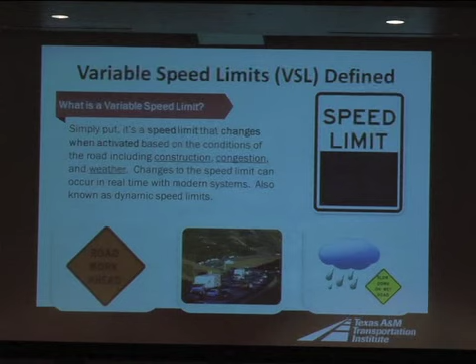And the conditions that might trigger variable speed limits would include construction, a work zone application where you have congestion that's building, a regular congested corridor where on a daily basis you have congestion that builds just because of traffic and conditions, and then weather. So there's a variety of weather applications that might generate a need for variable speed limits. And the idea is to use technology to monitor the conditions of the facility and trigger that variable speed limit as conditions warrant, so that the drivers are aware of the conditions that are occurring.

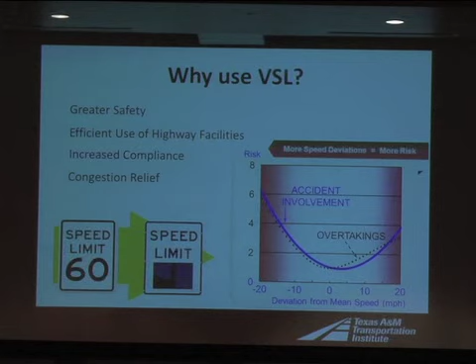So there's 3 applications that are typically used to activate VSL, and I've mentioned those before. Congestion, where you are measuring speeds, volumes, and occupancies on the corridor, and an algorithm running in the background, a lot like the queue warning when the smart people come up with the algorithm. And when the data coming in says we have congestion building, let's trigger the VSL, then that's the first application.

Lane closures, they function very similarly because you have congestion building as a function of a lane closure or a work zone application. So again, the algorithm triggers the variable speed limits. And then in weather, the 2 typical measures that will trigger the VSL would be pavement surface friction, so that's looking at water and ice on the pavement, as well as visibility. And the visibility could be a function of fog, heavy rain, or snow.

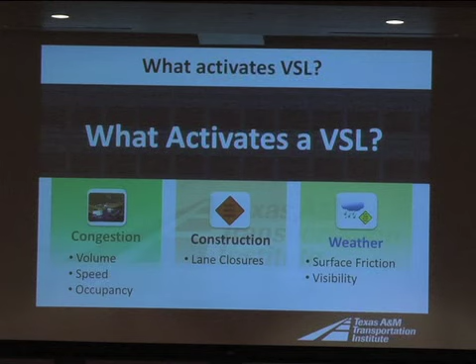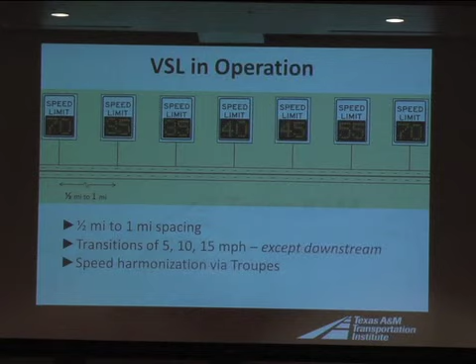In operation, this is a layout you might typically see. The spacing between the individual signs might be anywhere from a half mile to a mile. And the idea is to transition the speeds down slowly so a driver gradually reduces his speed as he comes up on the back of a queue. And the harmonization or the uniformity of that is all done by an algorithm that measures all the traffic out in the field in different segments.

So in the activation stage, the variable speed limit, the way it's operated here in Texas and in a lot of other locations, the algorithm running in the TMC determines that the VSL needs to be activated. So the system will alert the traffic management center, and an operator in the traffic management center will get an alert that says VSL needs to be activated. And in this case, an operator will either accept that plan that's being recommended by the algorithm or deny it for whatever reason it might be.

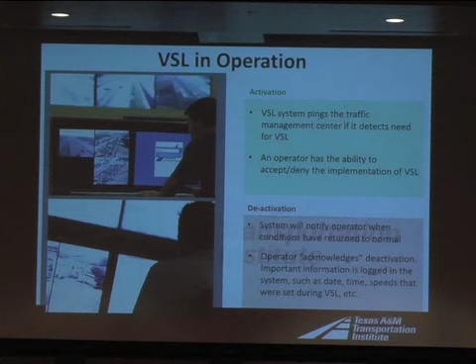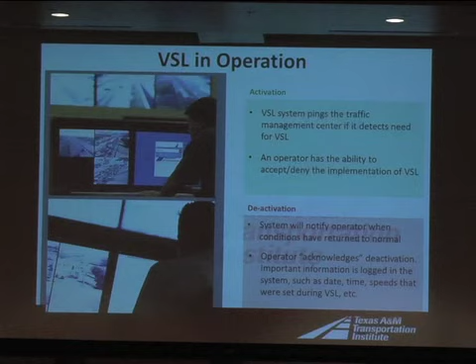And then if the algorithm is accepted, then the system goes into operation and the speed limits start to change. It can change as often as every 2 to 3 minutes based on how quickly that congestion is changing out in the field. And then in the deactivation, it's very similar. Once the need for that VSL goes away, the operator can basically deactivate the VSL and it goes back to the standard sign of what the speed limits are indicated for that location. In this case, it's 70 miles per hour.

So in 2013, the legislature passed House Bill 2204 to authorize TxDOT to conduct a pilot study to look at variable speed limits. Up until that time, VSL was not possible in the state of Texas. And in most cases, the states have to go in and have authorization to do it. So the legislature wanted TxDOT to be able to test it, see if it has the potential to improve congested conditions for a variety of applications.

The law passed required that TxDOT select at least 3 locations to look at variable speed limits under 3 conditions that are listed here: construction, congestion, and weather. The bill actually expires in February of this next year. So the study had to be done before February.

The law also required that we have advanced warning signs to alert drivers that the speeds are going to be reduced. And TxDOT worked with TTI to develop an interagency contract to help TxDOT with the deployment and an evaluation of these pilot studies. And that's TTI's role. We've also worked with Southwest Research, and I'll get to that a little bit as to why we were engaged with Southwest.

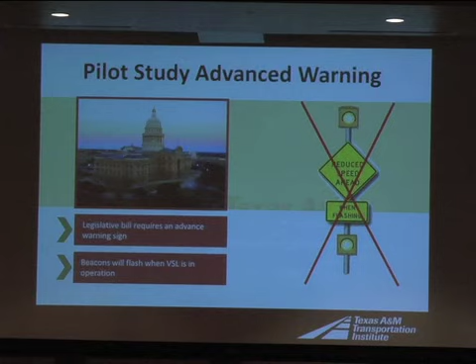So the pilot study advanced warning sign, this is typically what a driver would see if we were reducing speeds as you're coming into a different speed zone. The legislative bill required this sign, and we felt that that was very difficult to install for a short-term pilot study.

So we came up with this sign that is just a portable changeable message sign that we put out in advance of the VSL corridors, and it just indicates that there's a reduced speed ahead. And it is connected to the variable speed limit signs. And so when the VSL algorithm isn't operating, this sign just says drive safely.

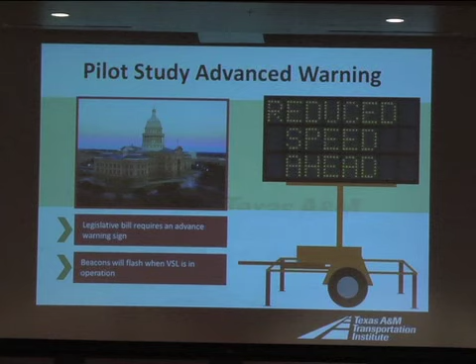So the pilot study started in January, and we have helped TxDOT along the way with the selection of the 3 sites, the development of an implementation plan, which involved the design of the signs and the system. We worked with Southwest Research to develop the algorithm. TxDOT requested and required that the algorithm function within Lone Star, so that required the partnership with Southwest Research to get that done. And so we worked with them to develop the algorithm.

We developed an evaluation plan and equipment assistance. So we worked with procuring the equipment, and were able to leverage some of the existing contracts with the I-35 project to expedite this because we had such a short time frame. And then we helped implement the equipment, and we are helping maintain it while it's out in the field, and we're under the evaluation stage right now.

We currently have all systems operational through the end of October. The current plan is to start to stagger them in terms of termination. So I believe the Waco site will go through the end of November, the San Antonio site will go through the end of December, and the Ranger Hill site on I-20 will go through the end of January. And all of the sites have to be deactivated by January 31st.

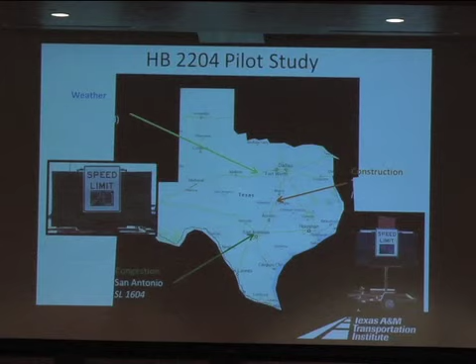The typical lead time on a sign that you might typically use in this, if it's not on an overhead gantry, might be 3 to 6 months, and we didn't have that amount of time to get them underway. So those are the 3 sites, and I'm going to go through each of those fairly quickly.

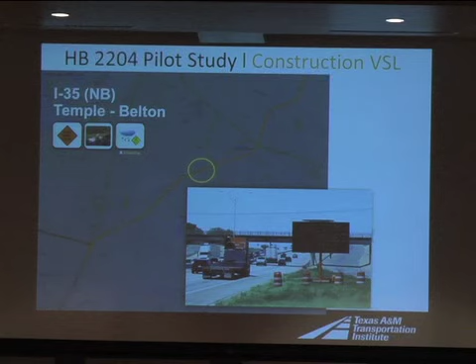The construction site is on I-35 between Temple and Belton, as John mentioned, and John showed you a picture of it. I don't believe I have a picture of it. The only difference between these signs and the one you saw before is it has the work zone placard on it because that was necessary for that work zone. So we use a portable changeable message sign to indicate where the variable speed limit corridor is.

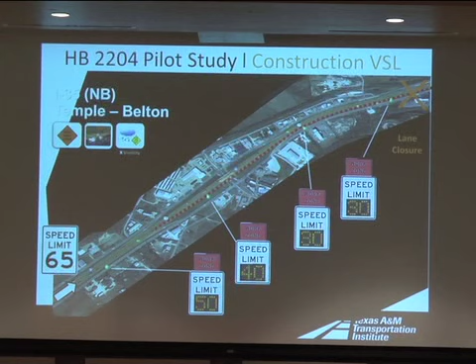And so the way it works is this sign, this is in the northbound direction, and so that's from bottom left-hand corner to the upper right-hand corner. And the first sign on the right is the one that's at that tail end of that queue. So the queues start to build up ahead of it. And so we're working to reduce speeds as drivers come up on that congested point so that they don't come up on that unaware and have to slam on the brakes and reduce their speed too quickly. This site, that's the lane closure that we talked about, and there's congestion within that work zone.

This site began on June 23rd of this year. Right after it went live, I think I was at a conference somewhere on the other side of the country, and it activated within 15 minutes of being turned on because we had a huge thunderstorm come through the site. So we found it worked.

We were really excited. And actually, I was at a Freeway Operations Committee mid-year meeting, and I'm telling people, hey, our site went live, and hey, it's working. They're really interested in it, too, because a lot of agencies are interested in seeing how this project goes. I know California, I've had several phone calls from them.

This site has the pavement sensor, so we're measuring the moisture on the pavement to determine whether or not the system needs to be activated in addition to congestion. Some of the initial observations that we've made as the system went live is we had to modify some of the calibration on the pavement sensor detectors. What was happening was it was activating very quickly, but because it's actually measuring the pavement on the shoulder, that dries slower than the main lanes, so we had to tweak the algorithm so that it would recover faster.

We have had some comments about the visibility. If it's in direct sunlight, it's a little difficult to see. We've worked with the vendor to correct that, and we think we have a solution that's going to work very well and won't overpower drivers at night, but in direct sunlight will be able to be visible.

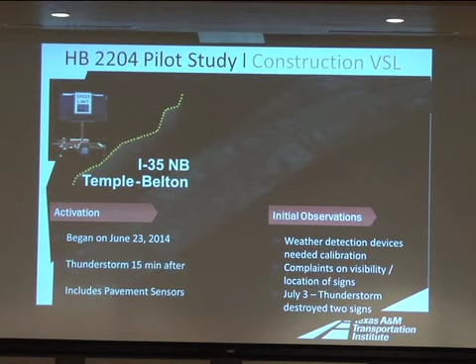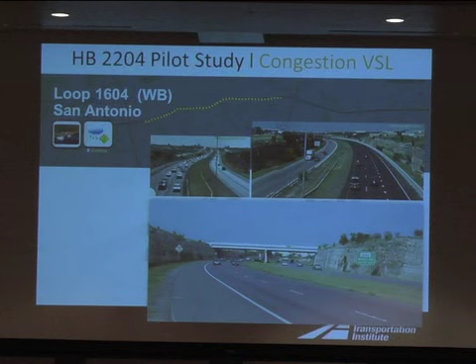So in San Antonio, this is the congestion location, and it's on 1604 between 35 and I-10 in the westbound direction. And this is a much longer segment. Congestion builds on a regular basis, and we have 8 signs out here in this particular location. So it functions a little differently simply because the spacing between the signs is a little longer, and we are trying to control the speeds anywhere within that corridor.

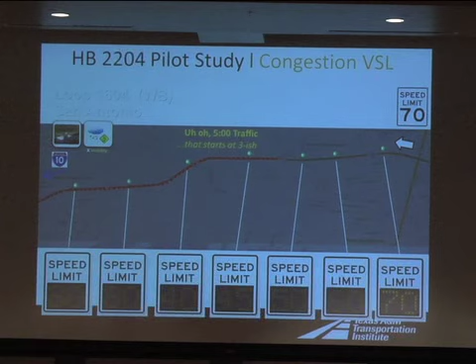So in this direction, you can kind of see how the speeds might start to change and how we would activate it based on the congestion that's building. This site activated on June 30th of this year. It includes the same pavement sensors that we have on the Waco site. And we have seen regular occurrences of the system activating. So it's doing what it's supposed to do.

One of the things we're looking at is how quickly it responds to congestion and how quickly it recovers again. And I'll talk a little bit at the end about the evaluation that's going on and how these sites perform a little differently. And so we're looking at the different data coming in to figure out how they perform under all of the conditions.

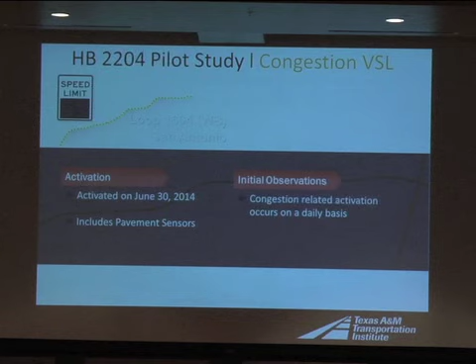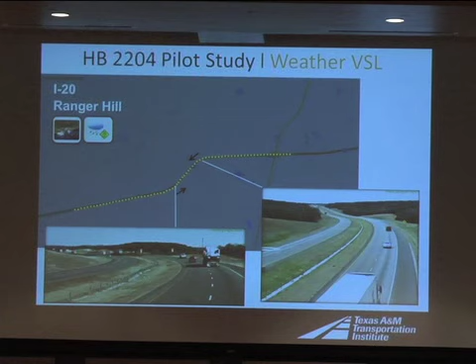The third site is on I-20 in the Brownwood district, and it's in the area called Ranger Hill. I'd never heard of this until this project, because I don't go up there very often. But this is a steep grade hill where there's propensity to have bad weather, ice and snow, and high winds. So it's a similar section, about 2.5 miles. This site has the signs in both directions. It's the one site where TxDOT wanted to look at both directions because it is a problem in both directions.

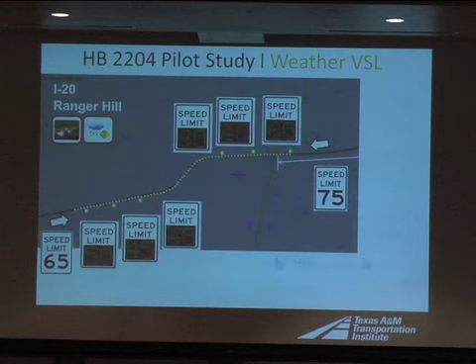It activated on July 21st, and what we have learned is the hot spots for weather are difficult to predict, and as of yet we haven't had any major weather flare-ups. That's one of the reasons that we're going to extend this site as long as possible into the early winter months to hopefully get some winter events where we can see how it performs. Even though that data may not necessarily go into the report that goes to the legislature, TxDOT will get a revised version of that report when we include some of the data from the extensions.

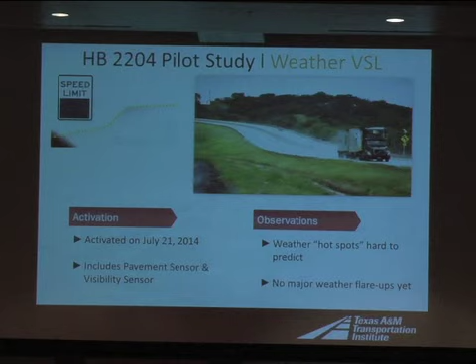So in terms of the evaluation, what we are looking at are a variety of operational measures to see whether or not the system is beneficial. We are looking at the speeds in the corridor. How do the speeds of the traffic compare to the speed limits with and without the variable speed limits? We're looking at not only the average speeds, but the 85th percentile speeds, and we're also going to look at that speed differential. So how closely are the drivers driving to the speed limits that's posted? So that's one of the things that we're looking at.

We're also looking at the speed profile. So as the drivers come up on the back of that congestion, how quickly are they decelerating? Are they doing what we're asking them to do and going 60, then 55, then 50, 45, or are they just going from 70 to 30 immediately in about a half-mile segment?

We're also looking at, we've done some surveys and interviews of travelers in the 3 regions to see if they've seen the signs, do they understand them, do they understand what they're supposed to do, do they trust or believe the information that's on those signs. And we're also looking at some violation behavior in the San Antonio region, looking at are people actually paying attention to them and traveling at that speed that's being posted, or are they just totally disregarding it unless there's law enforcement in the area. So that's one of the other things that we're looking at.